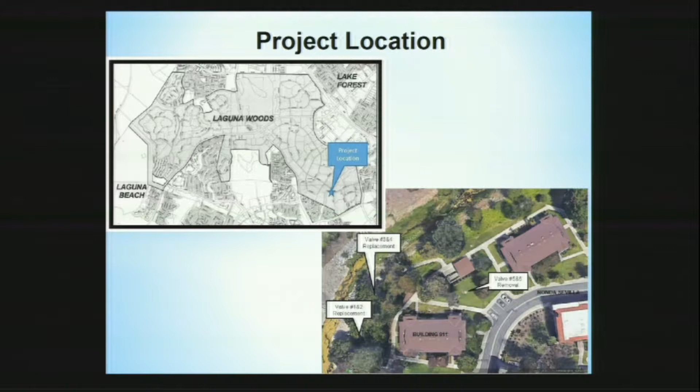The overall scope of this project was to upgrade 6 valve vaults, 3 located on the JTM pipeline and 3 on the ETM. It was a joint project with Moulton Niguel, considering proximity of those vaults, so we combined the JTM project and Moulton Niguel project into one, which is much easier to deal with rather than coming back later. The scope for vault number 1 and 2, located on the left lower side close to Aliso Creek, was to rehabilitate or remove the 42-inch ball valve, remove the 24-inch valve, and modify concrete vaults 1 and 2 by extending vaults to grade. The existing vaults are pretty deep, around 20 feet, with a 3-foot diameter manway, which creates problems for maintenance. So we extended those vaults above grade, installed larger access hatches, and constructed maintenance pads. The scope for those vaults also included modification to the retaining wall and restoration of landscaping.

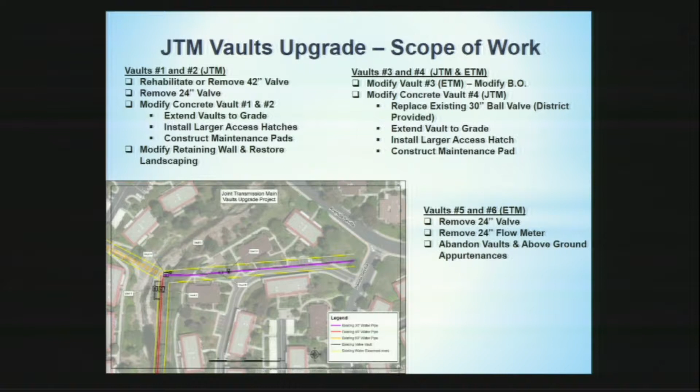The project schedule: notice to proceed was issued on December 18, 2018. The contractor was mobilized on January 23rd, 2019. The JTM shutdown was scheduled for 2 weeks, from March 15 to March 30.

ETM shutdown was extended another two weeks to April 15, and the completion date was July 11, 2019.

The project challenges, a couple of those. The major one was site constraints, limited JTM shutdown, deep excavation on unstable soil, high groundwater, proximity to Aliso Creek, and wet weather. So, site constraints.

If you take a look at this picture, the shaded area actually shows the construction easement, which was negotiated with the HOA, and it was relatively narrow access to the three vaults located near Aliso Creek. The HOA also requested that access to those buildings, and also to a laundry room, which is the small building between buildings 911 and 912, needs to be maintained all the time. So the construction of the two vaults, vault number 5 and 6, was actually on the way to the creek.

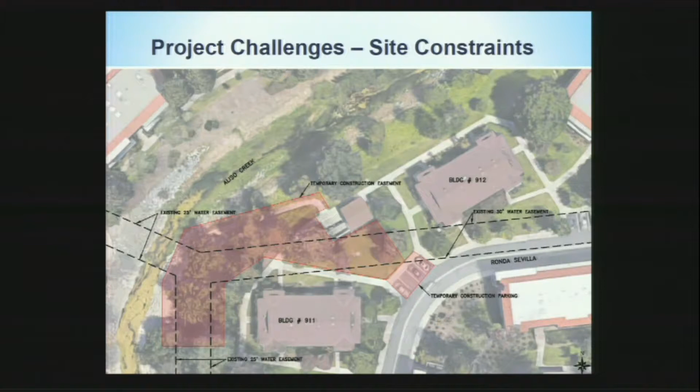So the contractor couldn't do the work on vaults at the same time. They had to finish the work on vault number 1, 2, and 3, and come back to vault number 5 and 6. Another project challenge was deep excavation.

This photo shows the 20-foot deep excavation for vault number 5 and 6. As you see, there was a constant battle with groundwater, and also it was a rainy February. So it was really a challenge for the contractor to keep everybody safe and proceed with construction.

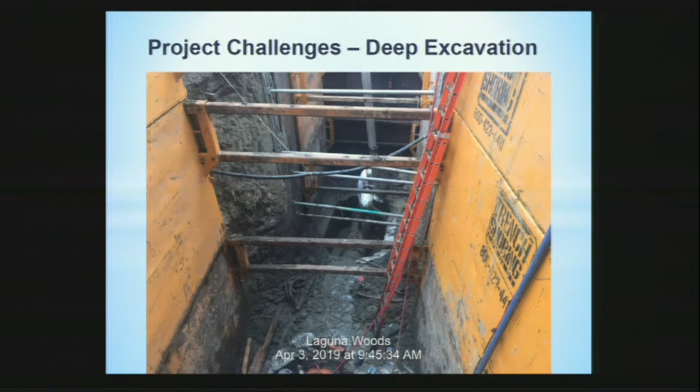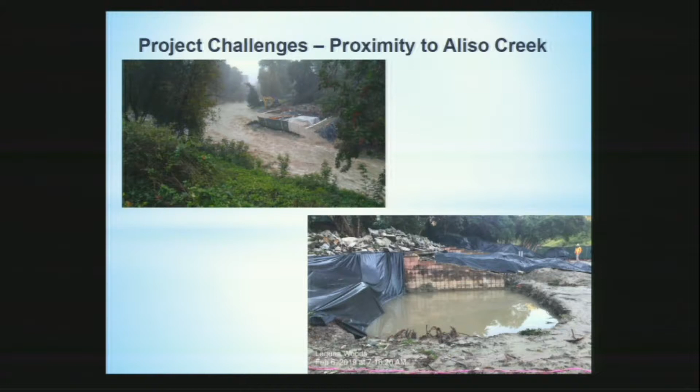Another project challenge was the proximity of Aliso Creek. As you see on the upper picture, whitewater rafting on Aliso Creek is possible sometime during winter. And the lower picture shows the aftermath, I believe at vault number 4. So the contractor had to deal with those elements as well.

Another challenge was wet weather. The upper picture shows the access around vault number 5 and 6, and as you can see, it was pretty muddy. The lower picture shows the contractor dealing with construction during the rain.

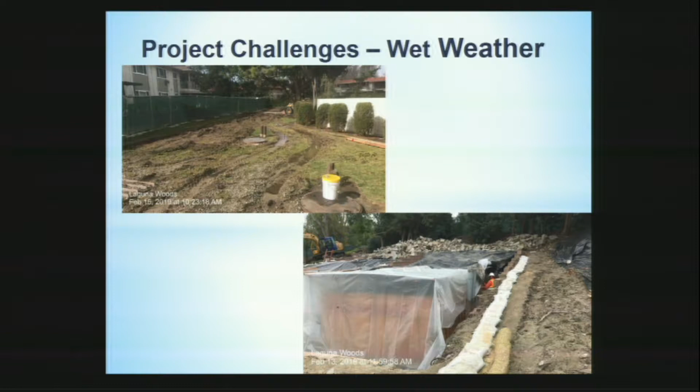Lesson learned for the permitting, easement, access, and design. A couple of lessons: first, identify and obtain all permits and necessary waivers. Coordinate with property owners on construction easements. Identify access limitations and clearly define them in the contract documents for the contractor.

A pre-construction survey of existing improvements is also very important, and for complex projects like this one, it's good to provide a third party constructability review prior to construction bid. Actually, Butier did this constructability review, and it really helped us with those small things that sometimes during construction became big change orders.

Also, lesson learned: provide detailed site safety requirements in the contract documents. We were dealing with deep excavation, access, and confined spaces. For the contractor, it was clear what our safety requirements were, so there wasn't any dispute during construction about what we required from them.

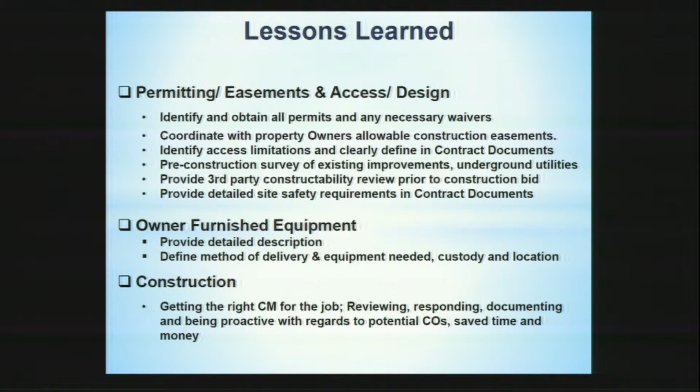Project costs: the balance of final design and permitting, we spent $69,600. Construction contract, the portion of JRWSS, was $679,900. Construction management, inspection and testing was $106,500.

Tree removal and landscape restoration was $48,200. District time and environmental was $119,600.

And the field orders actually resulted in a $22,900 deduction. In anticipation of changes during construction, we allocated $50,000 for field orders, and we didn't use all of them. So this is the remainder.

So overall cost was $1,001,000, and the budget was $980,000... it was about $21,000 more than budgeted, and the overrun is mostly associated with the tree removal and landscape restoration. We didn't anticipate the requirements of the HOA, and the budget was set before we actually talked to them and pinned down what they needed.

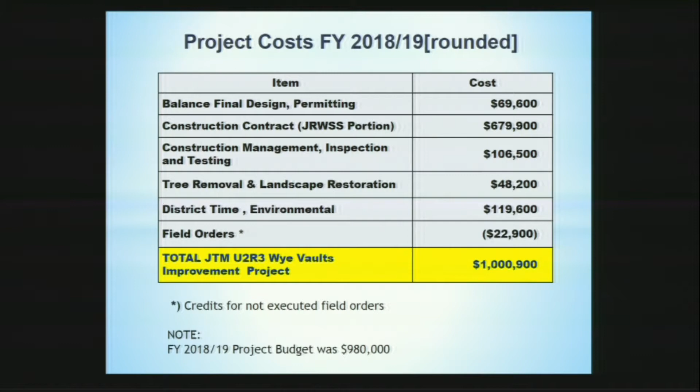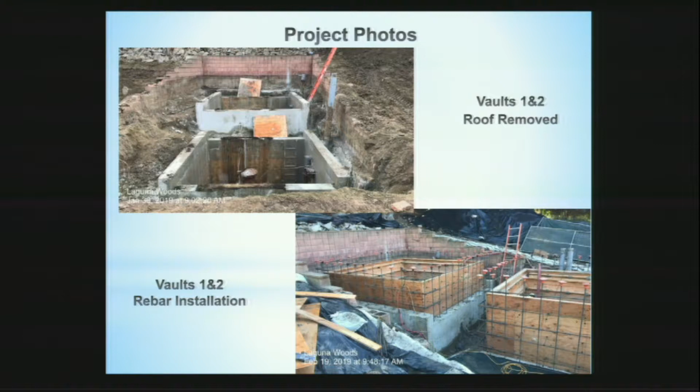Vault number 1, 42-inch valve. Actually, the plan was to try to rehabilitate the valve inside the vault without removal, so we required the contractor to contact the valve manufacturer rep to be on site.

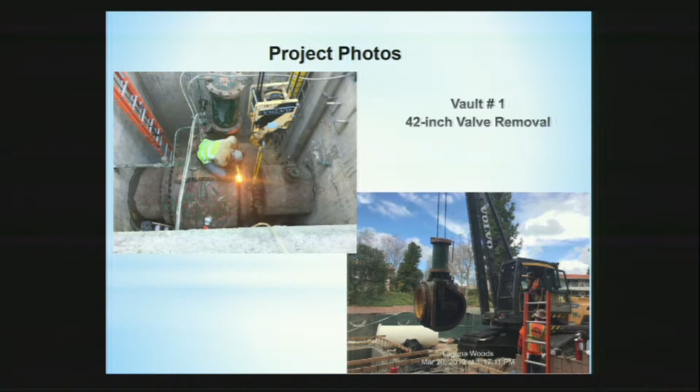and evaluate the possibility of rehabilitation. Unfortunately, the rep concluded that there's a leak around the shaft of the valve, and this leak cannot be fixed in the field, so the valve had to be removed. We went with the option of valve removal, and the lower picture shows removal of this valve from vault number 1. It's a pretty heavy piece of equipment, about 10 tons, so the contractor was kind of surprised and had to bring bigger equipment to move it.

Those two pictures show the installation of a 42-inch spool, installed in lieu of the valve, and a dismounting joint to ease the future installation of the valve.

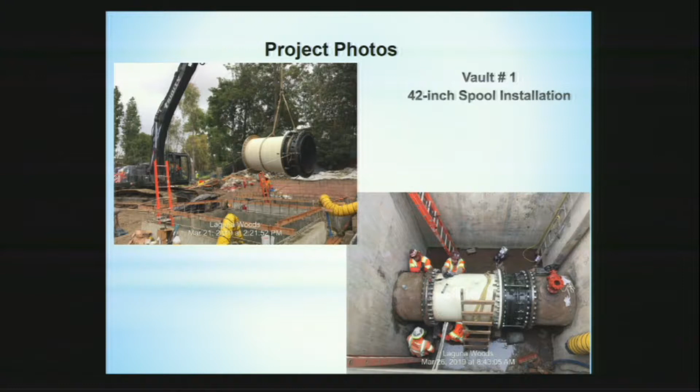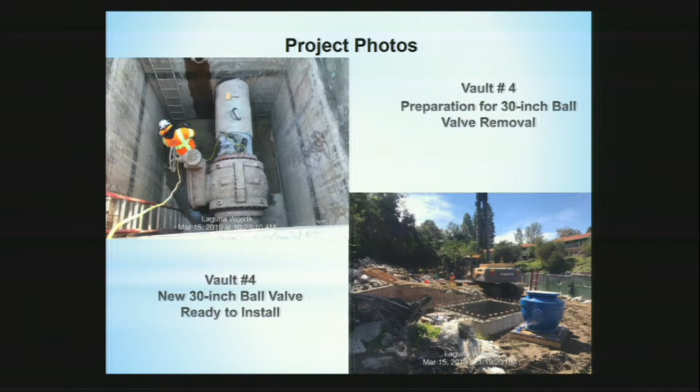Vault number 4, removal of the 30-inch ball valve and installation of the district-provided ball valve. It's shown in the lower picture in a nice blue color.

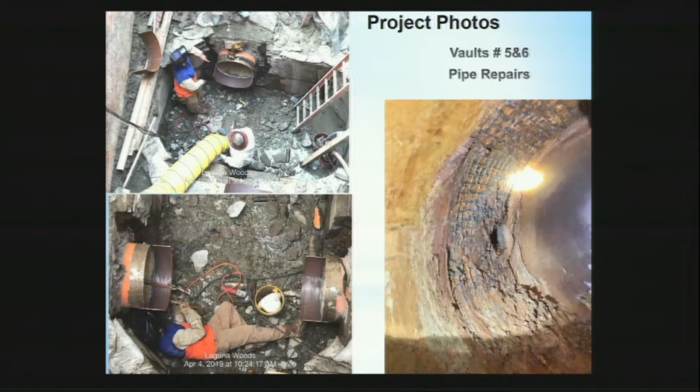The right picture shows the existing butt strap, which lost its cement mortar lining. This picture shows the repair and installation of the 24-inch spools in vault number 5 and 6. The lower left picture shows the method of repair. There was a 2-inch outlet from the pipe, so we directed the contractor to weld a small piece of steel to block this outlet.

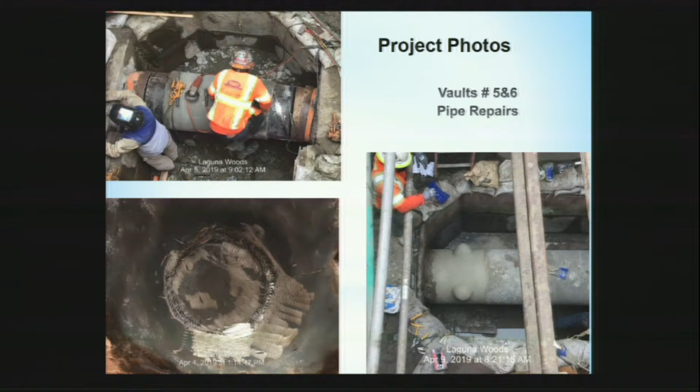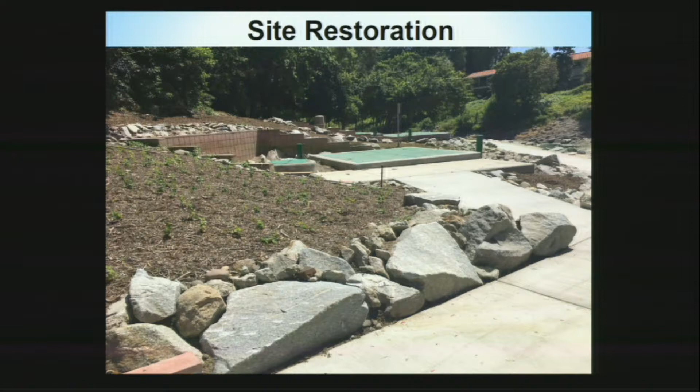This picture shows the final so-called final product. Now, as you see, the landscape was really nicely repaired with riprap, and you can see vault number 3 and 4, and in the background vault number 1 and 2. This is the area where vault number 5 and 6 were installed and removed, and the lawn was reinstalled. The HOA was very pleased with the outcome, and the contractor did a very good job.

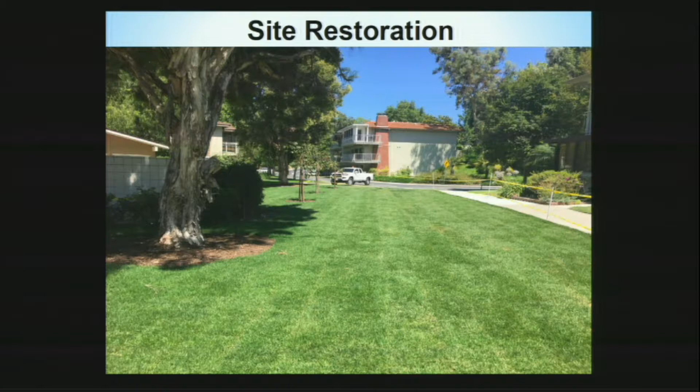So what were the next steps? Right now the existing valve was removed, and we contacted MWD, who have a rehabilitation shop in LaVerne. They inspected our valve and agreed to rehabilitate it, but they said the cost of the rehabilitation

if the steel seats are okay would be around $100,000. If the seats are not okay, it'd be an additional $25,000. We also contacted the original manufacturer, or whoever owns them right now, and they said they're not normally doing this, but considering special circumstances, they said they can rehabilitate it. However, we would have to ship it to the East Coast where their rehabilitation shop is, so it'd be pretty much the same cost as the rehabilitation at the MWD facility.

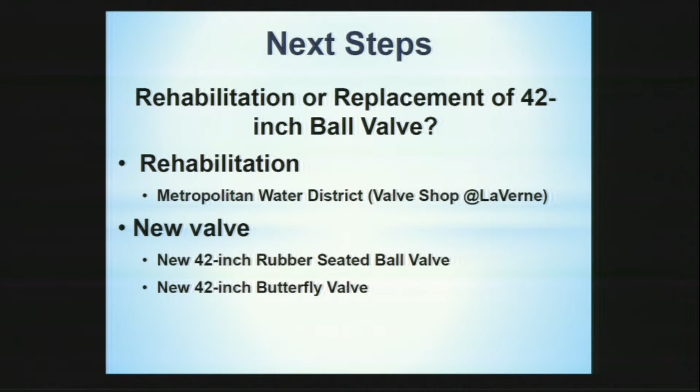As you see, access to the site for those valves is very difficult, and restoration will probably cost more than the valve itself. This issue was presented at JRWS's meeting in April, and it looks like member agencies are leaning toward installation of the rubber-seated ball valve. But I think it would be worth bringing this issue up again and discussing whether the ball valve or butterfly valve is the best option, which suits the JTM.

That's all what I have, and I'm open for questions.

No questions. Wonderful presentation, and congratulations on basically sticking the landing with the cost estimate. You were right on it, a little over this time, so at least I feel you guys aren't superhuman, you aren't coming in under every time. Well, I'm trying, but sometimes it is what it is.

Thank you. I'd like to also congratulate you, and from a layman's term, the project challenges of the creek. That's just impressive, and the depth as well. Glad that everything went off with no injuries and nothing.

The one question I do have is one of the pictures a few back. You don't have to pull it up, but I'll probably highlight this at a board meeting. The condition of the pipe, how much area did we get to inspect through the pipe? Because in that one shot, if you could judge from it, it looked like the pipe had a pretty rough condition in areas.

Yes, so we inspected the JTM pipeline, which was 60-inch on the upstream side and 42-inch on the downstream side. It's about, I believe, 50 feet. And the ETM portion was also inspected in person, if you will, for about 20 feet. The rest was inspected with the camera, and it looks actually pretty good.

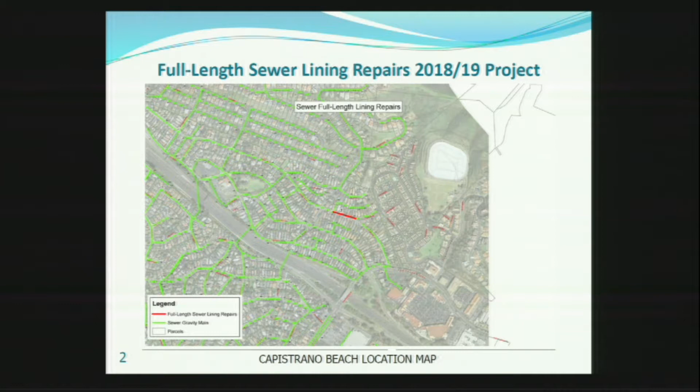I'll give you a wrap-up presentation on the last fiscal year's full-length sewer lining project. As Joe stated, we did 18 line segments, about 3,300 linear feet. One line segment was done in Capistrano Beach, highlighted in dark red. We had 2 line segments in our Dana Point service area, and the majority of the lining project was done in our South Coast service area.

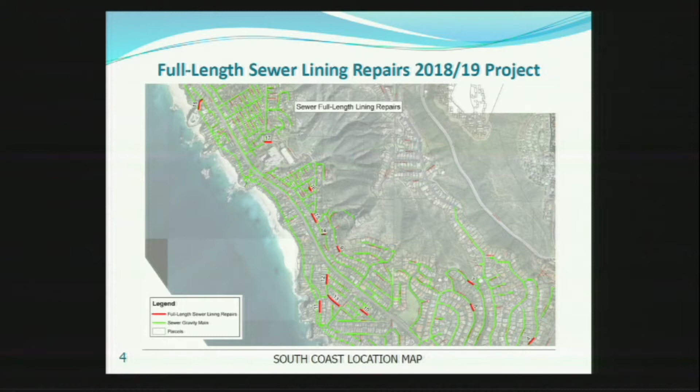The project, along with my CCTV staff of Jimmy Gomez and David Chacon, was developed using the PACP scores off of the annual CCTV videos that are done. Monthly we go over and look at the scores, typically PACP 4s and 5s, which would be your roots, fractures, broken pipes. We sit down and from a maintenance point of view, different perspectives determine which ones would be the most beneficial to line.

That's an ongoing process. The final list was developed by January 17th of this year. We put it out to bid, bids were due by March 15th, and we brought it to the E&O committee on April 15th. On April 25th, the board of directors took action, and we gave the contractor, Sancon, the notice to proceed on June 3rd, and they completed the project on June 26th.

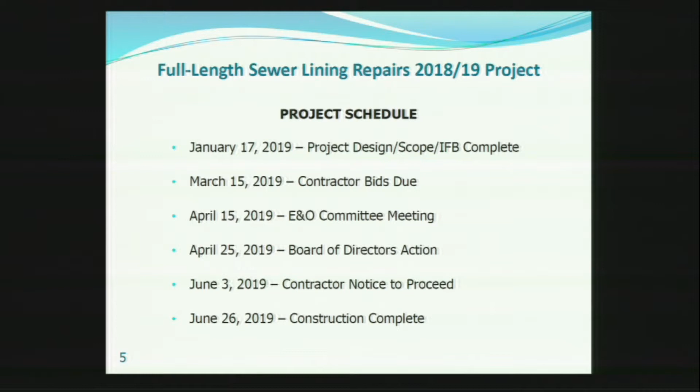During the project, there were some lessons learned. One of our pipe diameters, number 3, Amber Lantern and Coast Highway, was labeled in our GIS as an 8-inch line when in fact it was a 10-inch. The lesson learned there is to make sure as we come across these things, we update our GIS system correctly.

Thankfully, we had another line that was 1 foot off of that footage, so we were able to use that bag in another line, an actual 8-inch segment, number 9, 24 North Vista de Catalina. Then we had a change order for ordering a 10-inch liner to go back and do number 3 on the staff report. So it ended up very minimal, and it worked out pretty well.

Another lesson learned for me personally going into next year: you may remember on social media we highlighted a surcharge manhole that my staff found in Lower Three Arch Bay. The majority of Lower Three Arch Bay drained to this drop manhole that went to the tunnel, a downstream line segment from where our contractor was lining. It may be coincidence. The blockage ended up being down in the P-trap in the tunnel, 70 feet down, so we never officially saw what it was. A lesson learned for next year is we'll set traps downstream from the lining project to collect any debris, just in case that's what it was. It may have been coincidental and not related, but it provides an opportunity to maybe take a different approach next year, just in case.

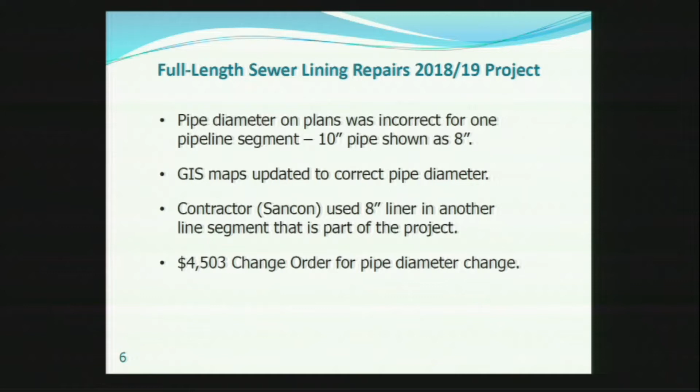As I said, continuously update GIS data. Any work that may need night work, weekend work, just anything where the circumstances are different than our regular daytime operations, be planning in advance, getting the proper traffic permits, whatever we need, in advance of that.

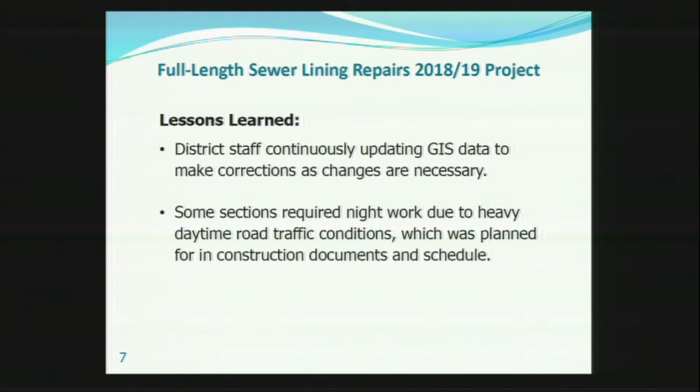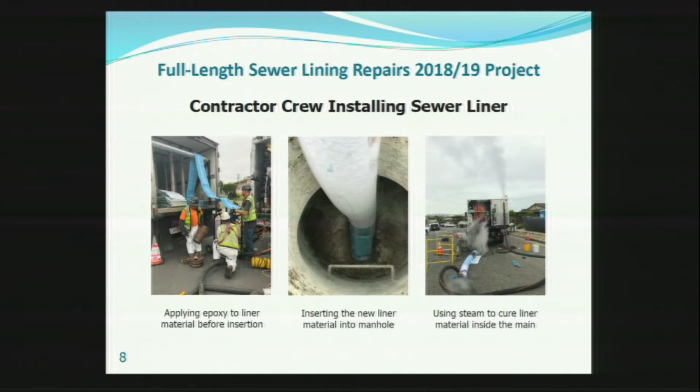Here are a couple pictures. The first one is the contractor applying the epoxy to the liner. The second one is the bag being inflated or installed from manhole to manhole. The third picture is where they use steam to cure the liner to the pipe.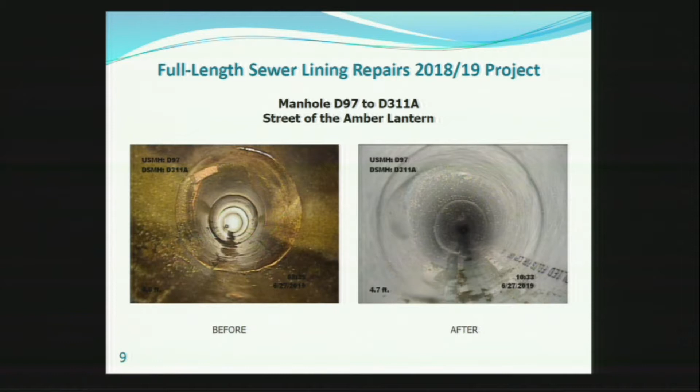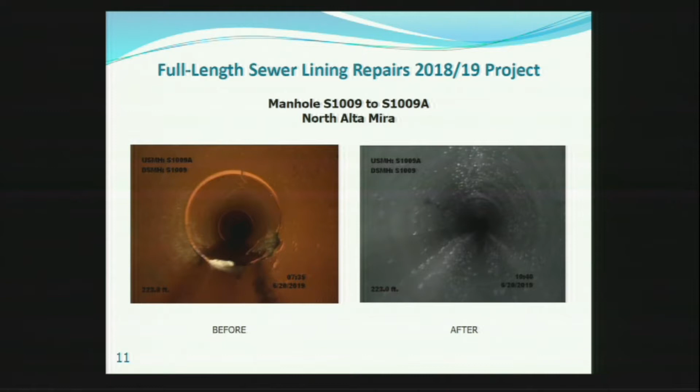Here's a couple before and after pictures of the line segments. The first one is the 10-inch line I referenced, the change order line. You can see a couple broken segments on this joint and the after picture. Here, some cracks, again the after picture. And then this one, same thing. This one's a good one where it shows a lot of roots coming in and grease being captured by the roots, which would eventually become a blockage.

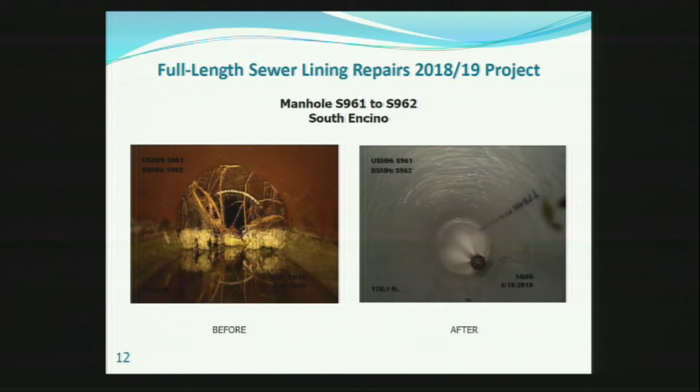That's the presentation. If you have any questions, I'd be happy to answer.

I don't have any questions other than, again, another congratulations. Because we're a coastal community, these are things that are extremely important. We always measure our system on the water side for loss, and the sewer side's just as important, in my opinion. If there's leaks and blockages, those can become very problematic. So it's not the sexiest part of our business, but it sure is a really important part.

Yes, and I think the public just out of sight, out of mind. But again, great job and good insight on thinking by coincidence, like you said, with that Three Arch Bay situation. That's good, forward thinking, seeing something that might not be the cause but can trigger something to spark a creative idea going forward. So keep up the good work.

Thank you. Yeah, again, it's another one of those projects. You guys, we give you a budget, you cut it in half, and then you beat that budget.

Great job. The only suggestion I have is if we have situations like this where we have a $250,000 budget, maybe if we get good costs, identify some additional reaches as add alternates, so you can add on an extra 2 or 3 reaches if needed. With prices like this, if we can get it done, let's get more done.